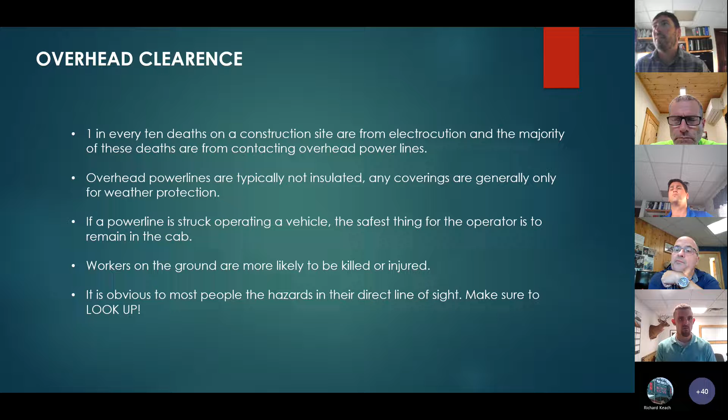It's pretty obvious for most people to see the hazards that are in their direct line of sight, and a lot of times people forget to look up. We had a little incident over at Middlebury Snow Bowl where a dump truck got into some lines when dumping, and even after Matt told me about it, I was like, where's that line, Dad? I didn't see it. So even I'm at fault of that sometimes.

So equipment, dump trucks, things like that should never come within 10 feet of the power line. And for cranes, because they have a swing load on them, they shouldn't come any closer than 25 feet.

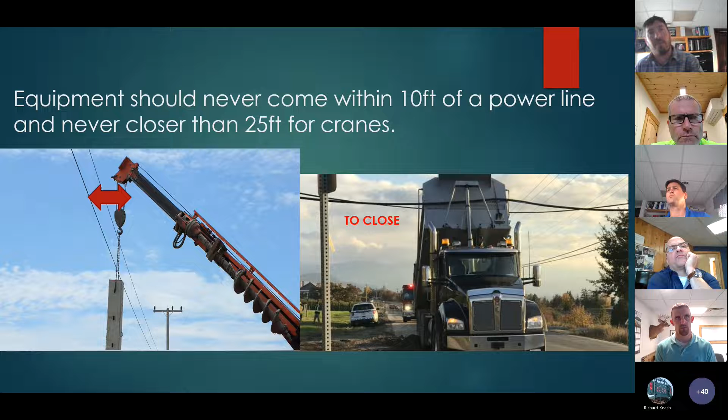These are some of the scenarios where you can come in contact with a line: moving a ladder to one area or another on the job site, moving scaffold around. A lot of times using a forklift, bucket truck, boom truck, scissor lift, excavator—that's what we would run into a lot here. Also while operating a crane. If you're working on a roof or something and you have a long tool or a piece of material, it can go off the edge and come in contact with the power line.

And then raising a dump truck bed, like I said, they had the issue there in Middlebury. It wasn't a power line, but it was still an overhead line that they need to be aware of.

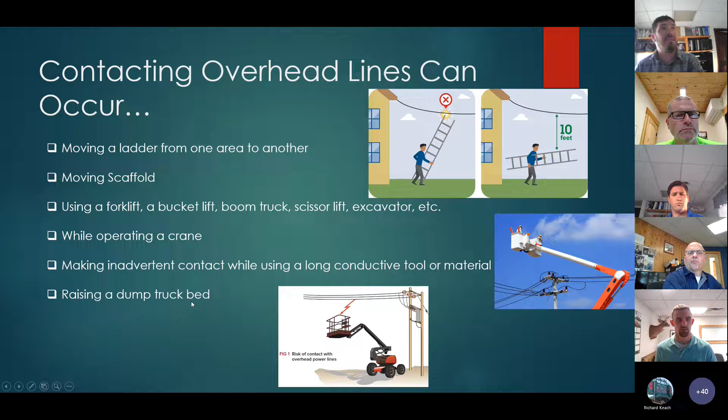Some of the protections and warnings: install flags or signs, or both, at the proper distances so people can see them when they need to. If the operator cannot see the power line, make sure there's a spotter there, just to make sure that they know exactly where they are. And if you cannot maintain adequate clearances, call the power company and have them come and insulate, move, or de-energize the line depending on the work that you're going to be performing. And that's all I really have.

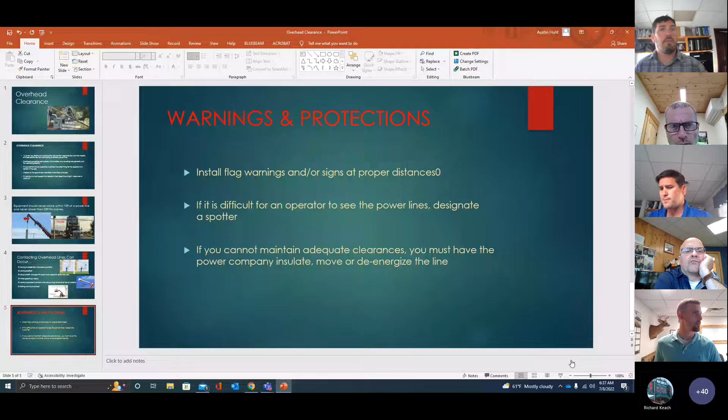Thanks, Austin. Yeah, we have a lot of overhead warning signs, or it's a good administrative control.

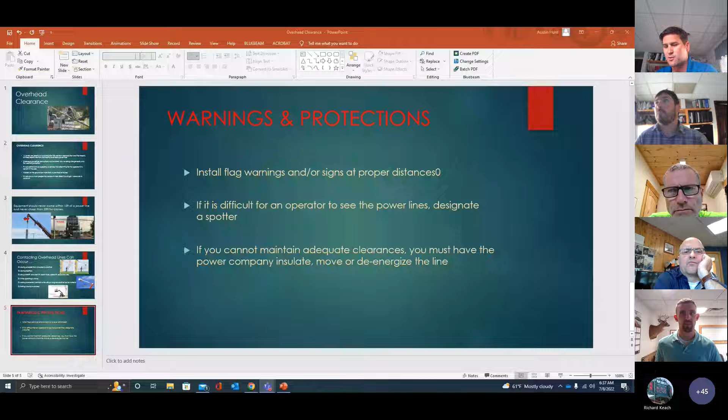So if you have overhead lines on your project that you may identify as an at-risk or unsafe condition, let's add that signage. Contact health and safety, and we can either help display those signs on site or put them in a location where you can find them. Again, all those signs are located in the tent way out back in the yard.

All sounds right, good. I think we got an announcement from Ben McKinney on fuel logs. We want to jump to that?

Sounds good. I'll share my other screen here. You guys see that? Yep, yeah, we're looking at the Teams channel.

Cool, alright. So off-road transfer tanks, off-road diesel transfer tanks. You've always been required to log fuel that goes into them and fuel that goes out from them into equipment. That's always been a thing. We've gotten a little lax on it. Safety department created a form in the Teams app to streamline this, and a lot of guys are using it. Some guys are using the old paper form, and some guys aren't doing anything.

So we made the decision to consolidate this reporting, and we're just going to use the Teams app moving forward. Every transfer tank fill-up is required to be logged in Teams, and every distribution from that transfer tank to equipment is required to be logged in Teams. That includes bulk tanks, so if you have a service coming to fill up a stationary 500-gallon tank on your job site, that gets logged too. That includes rental equipment, and we can answer any questions that you have.

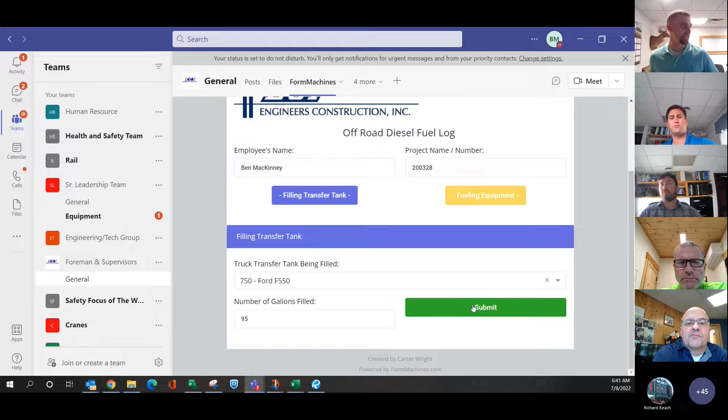Now I get my full fuel tank back to my job site, and I need to fill equipment. There's a couple more fields on this one. Fueling equipment, I click that second button. I select where it's coming from, 750.

I'm going to fill an excavator, number 529. And she was thirsty, she took 70 gallons. I've only got 20 left.

And this is important for hours on equipment. We track hours and equipment utilization in a number of ways. Of course, when we use this stuff, we bill it to our job, just like our own time. But the actual hours off the meter is important for fuel use auditing, and it's also really important for the service department.

That's how guys like Pat and Larry can schedule services. So if you see an air filter that hasn't been changed for 1,000 hours on a machine that's been on your job site for 1.5 years, but you haven't been logging this stuff, it makes sense why the service department may not be aware that it's due for service.

So I put in my hours, 9,241 hours. There's also a field here where it says maintenance or repairs needed. Now if this thing is hemorrhaging hydraulic oil, or if it looks like the boom's about to fall off, I probably don't want to put that here. But if I have something that isn't quite such a big deal, that would be a good place to put it. Maybe I need a replacement mirror, or maybe one of my tracks is making a lot of noise. When Pat gets the hour report at the end of the month, he'll get that too, and he can add that to his list. Again, I'm not going to submit this, but that's what I would do.

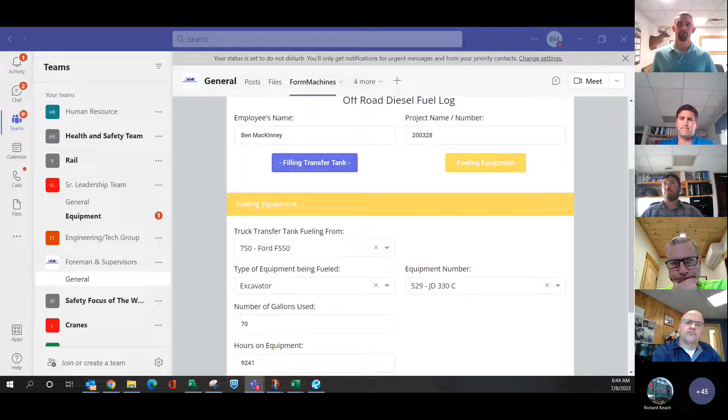Yeah, obviously fuel is expensive and important to track and everything at this point, especially, and hopefully prices come down a little bit, but I don't see it going back to where it was.

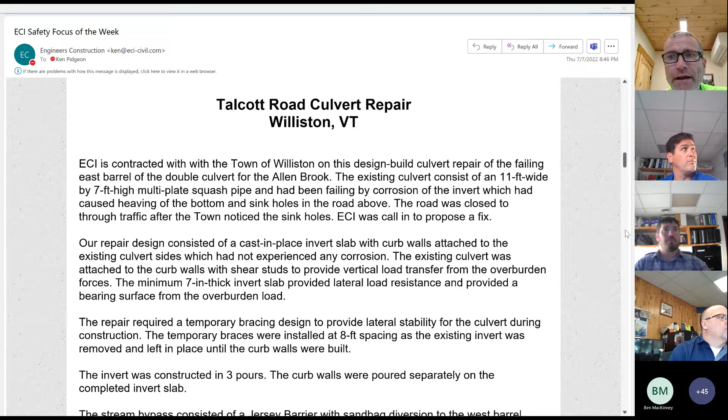Bump ahead here. Trying to miss something. Yep.

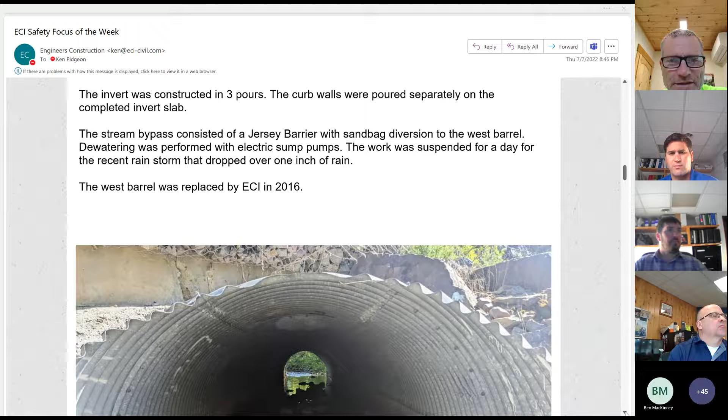The stream bypass consisted of a Jersey barrier with sandbag diversion to the west barrel. It was convenient having a second barrel, of course. Dewatering was performed with some electric sumps, and the work was suspended for a day when a recent rainstorm dumped over an inch of rain. The west barrel was replaced in 2016 by ECI.

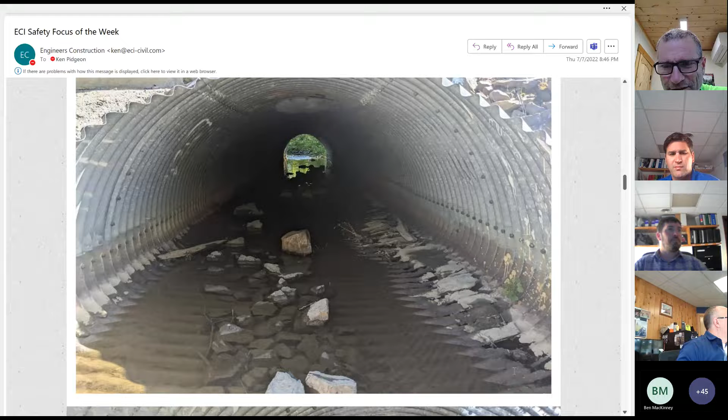This is looking downstream from on the original. You can see on the edges, especially right here near the front, but it continued all the way through. There was severe deterioration and some slight heaving and uplifting of the invert because of that.

What's trying to happen is the pipe, of course, a kind of squash pipe, acts a little different than a round pipe. But if you think of a round pipe, everything's working in compression - it's a compression ring - and if you have failure especially of the bottom or any point, what will happen is it'll start to push that bottom in, and when it does, it lifts it up.

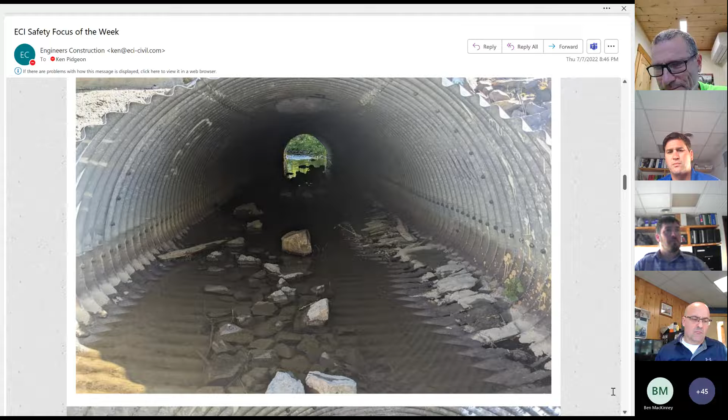This is my little survey of the bottom. I leveled this 6-foot level across the bottom, supported by the nut and bolt on the side, and then I just took measurements of the depth of the bottom to get a profile and some dimensions. It was hard to get a good cross-sectional dimension of any pipe like this that's not totally round, especially when it's gone through some deformations.

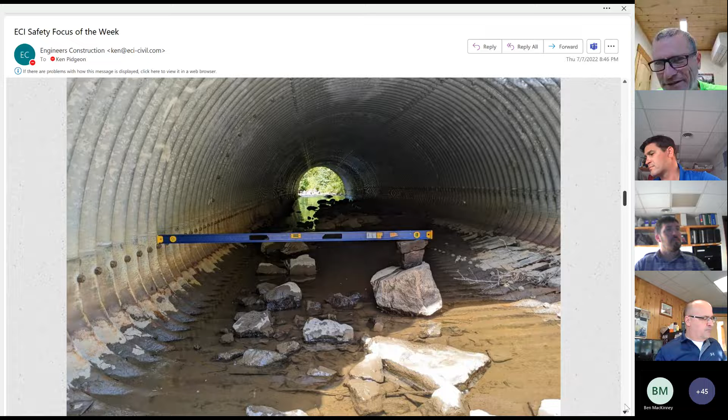As anyone knows who's put these things together, what the shape is on paper isn't always like what it really is. There's a lot of fit-up things, and when you put load on them, move them around, lifting them in place, and putting them in place by a lifter or so on, the shape is not perfectly as expected. So I needed a good profile or a good cross section.

Then we came up with a concept that we gave to the town. Essentially, as I described, we have an invert slab. First we excavate out the bottom, put the strut in at those 8-foot spacings, and then we would put the reinforced concrete slab in, and then these curb walls with little shear studs attached to the side wall of the culvert.

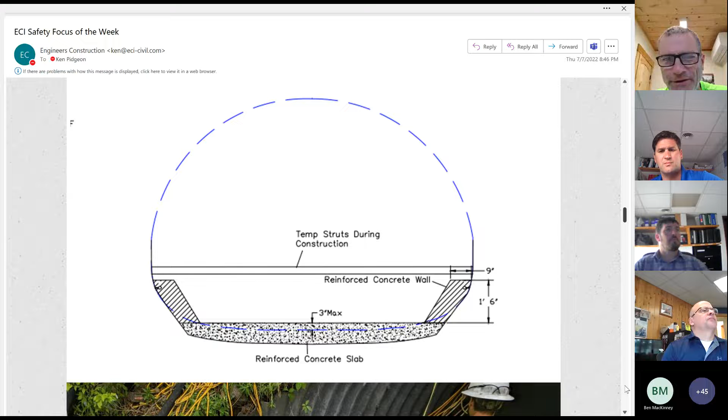So here we can see they're doing the first pour at the outlet end after dewatering, getting set up and excavating out. The shear studs are on the wall there. Just use rebar cutoffs because there are a lot of drops on this job. And then we're pouring in the invert here. Had some timber bracing at the edges to hold it out because the steel struts didn't really start until we got inboard a little bit further.

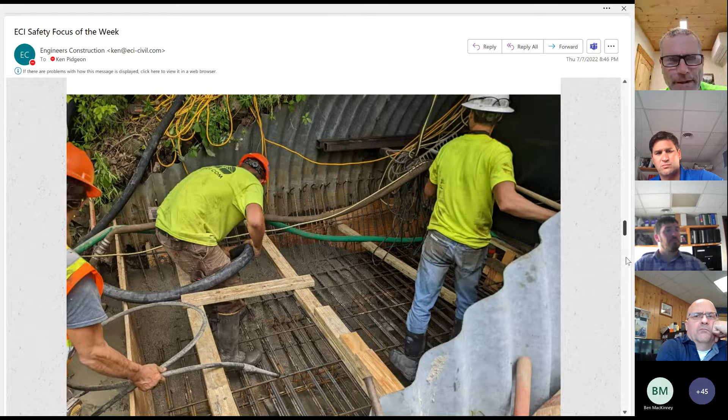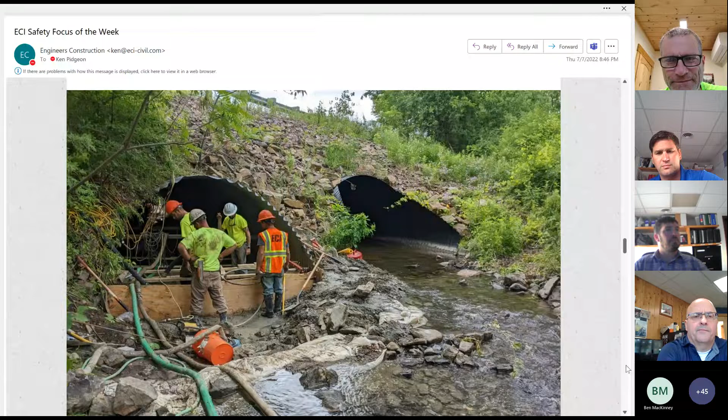You can see what it looks like from the downstream bank when they're doing this initial pour at the invert. There's the other barrel that's taking the water, the 2016 construction. And here we go, looking towards the outlet, I believe.

These are the struts in place. You can see some of the shear studs and the slab, the completed slab, and then the setting up of the curb wall forms beyond on the completed slab.

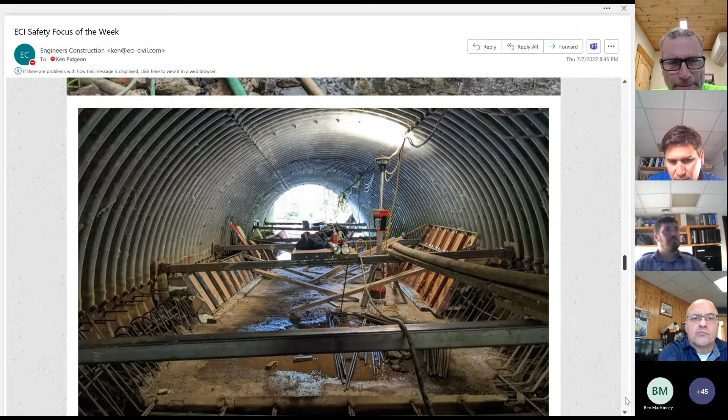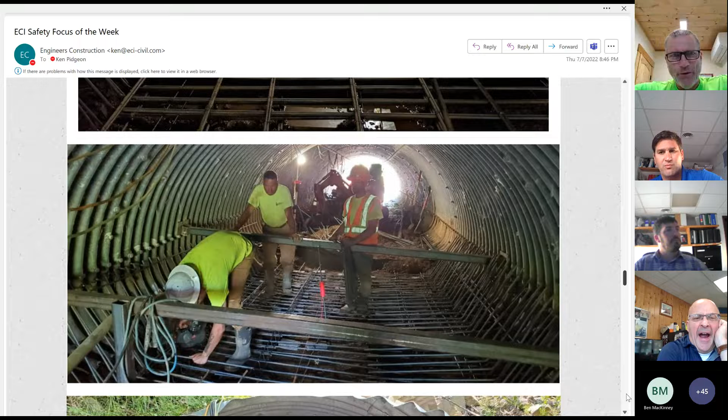Working around these struts were a pain, but it was important to keep the shape and the stability of the culvert during the work, because we took out that bottom, and without the bottom there really isn't much to hold it. It becomes a horseshoe, and it needs that resistance at the center.

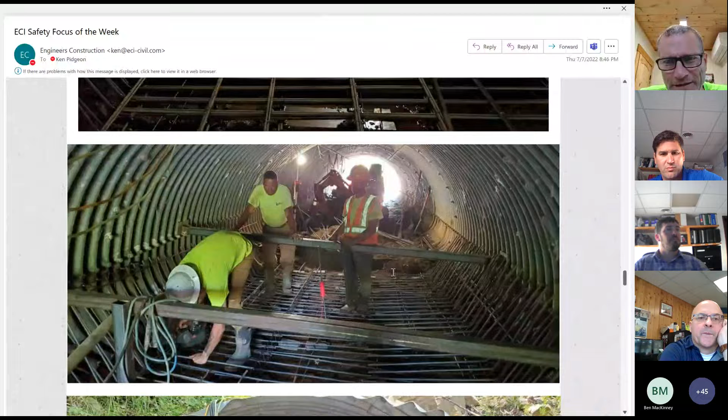So you can see if you had to walk down the whole thing, it would be a lot of stepping up and over. And then you see in the background here - let me go back one slide - you can see we excavated out with a mini excavator without the roll cage because we didn't have to worry about much for overturning there, and we're on flat level surface for the most part, so it worked.

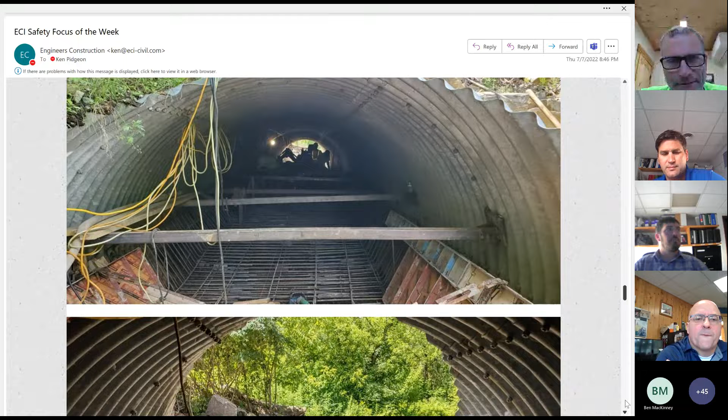We could take the roll cage off. We used a mini skid steer to pull the material out, and the little excavator scratched out the bottom. So a lot of smaller quantity material management here. Got it to the end, loaded it in a truck. It's a 100-foot long culvert.

And this is more the inlet end. You see the Jersey barrier for the cofferdam, getting ready for the final invert pour.

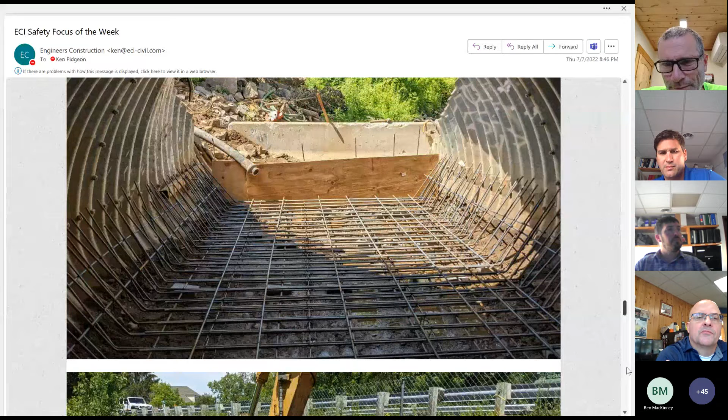Here you can see this metal coming out of the bottom. Other than where it was corroded, it was still pretty heavy gauge - I think it's like a 10 or 12 gauge - and it was corroded and ripped on the edges, but beyond that, there were pretty solid pieces.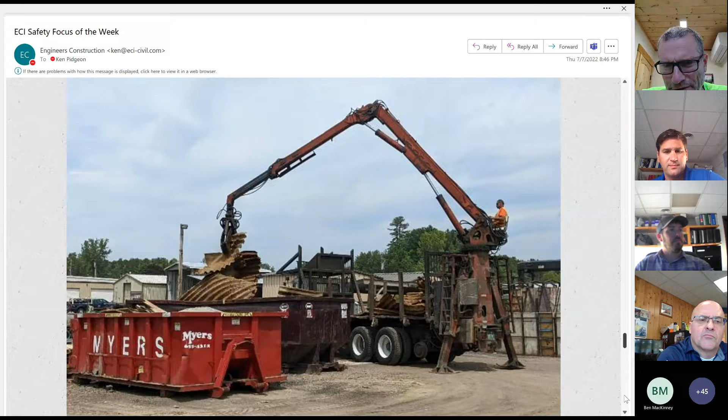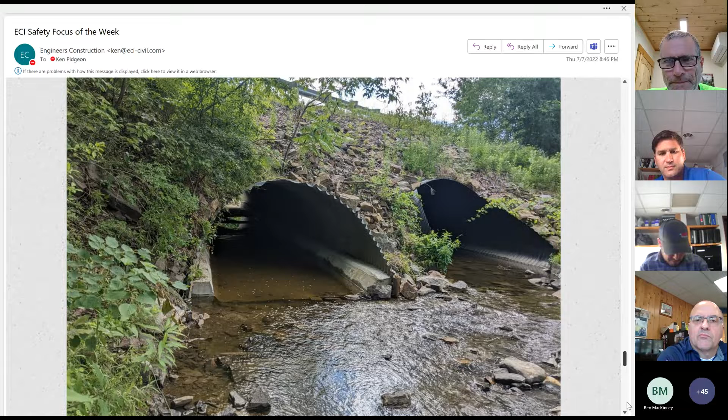And this was a couple days ago with a completed culvert on the outlet end. You see the wing walls installed, sitting next to the original, the 2016 one. There's about 9 foot of overburden on that culvert.

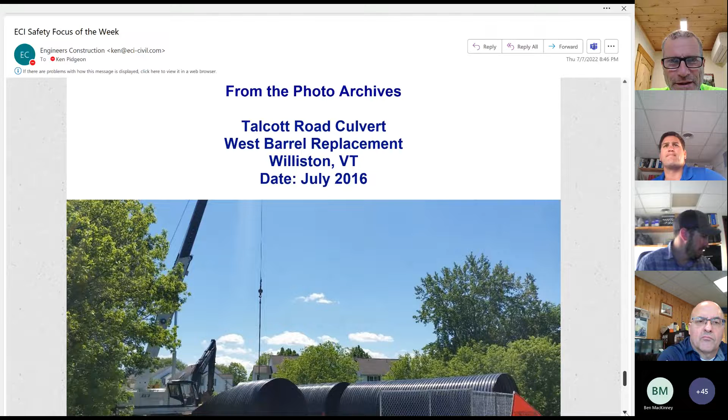So from the photo archives, I have the Talcott Road culvert west barrel replacement, Williston, back in 2016. So here we...

Assembling - actually, this is not a multi-plate, I don't believe. It doesn't look like it. I believe it came in these pieces. Yeah, I'm pretty certain it came in pieces like this, and then we installed them and put collars on them, I would say, what happened there.

You can see the little cranes in there. We had the whole road closed again. There was also a water main.

One of the reasons the town was anxious to get this fixed was because of the water line above. So that's what I got.